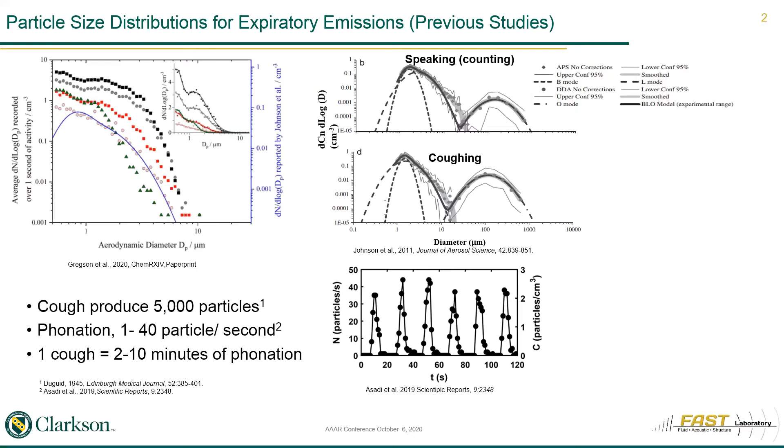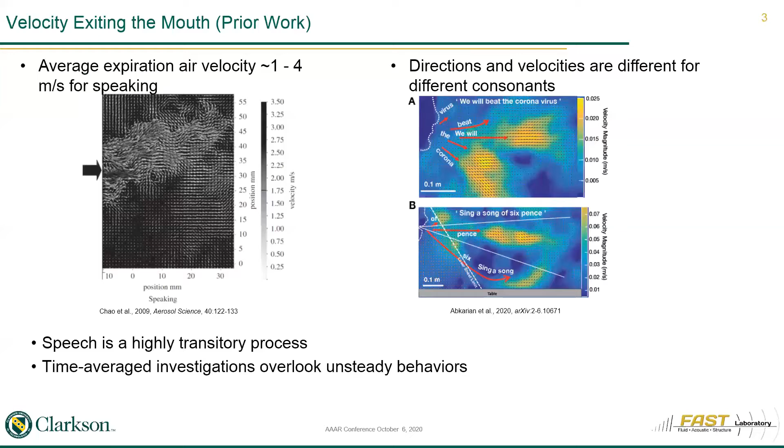Although one cough can produce as many as 5,000 particles, phonation has been shown to generate up to 40 particles per second, indicating that 2 to 10 minutes of phonation can produce as many total particles as one cough. Prior work has found the time-average velocity at the exit of the mouth to be in the range of 1 to 4 meters per second for a variety of phrases. Time-average measurements during running speech, however, obscure the highly transitory nature of voice production.

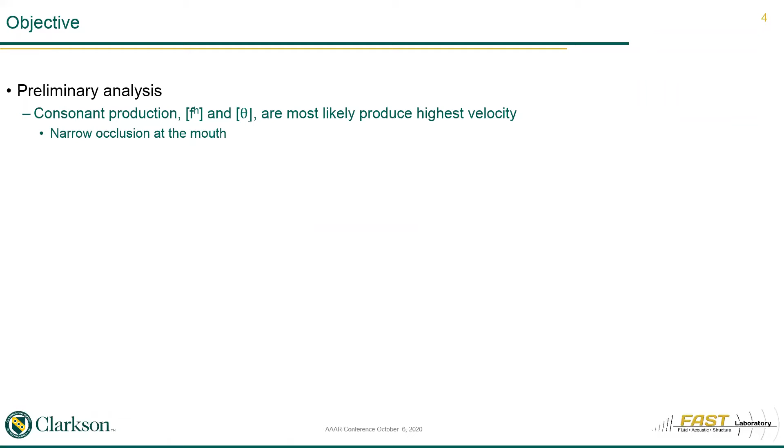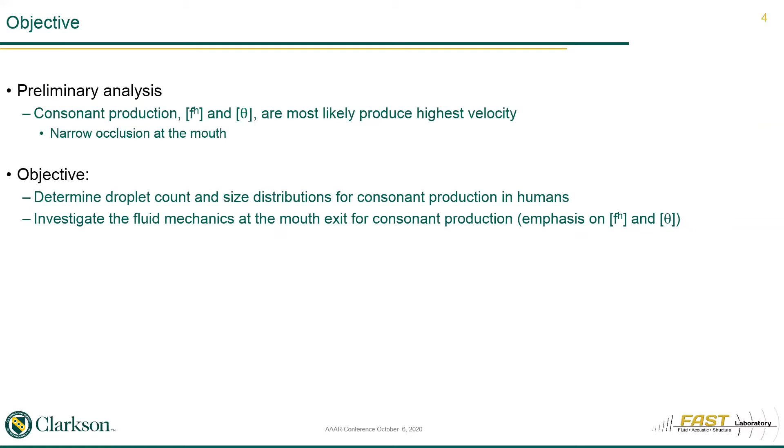From preliminary flow visualization during consonant production, we have found that fricatives that form a very narrow occlusion at the mouth, such as F and TH, are most likely to produce high velocity bursts of air. This observation leads to the objective of this work. First, determine the droplet count and size distribution for consonant production, and second, investigate the fluid mechanics at the exit of the mouth for these same consonants, where initial emphasis is placed on investigating the phones F and TH.

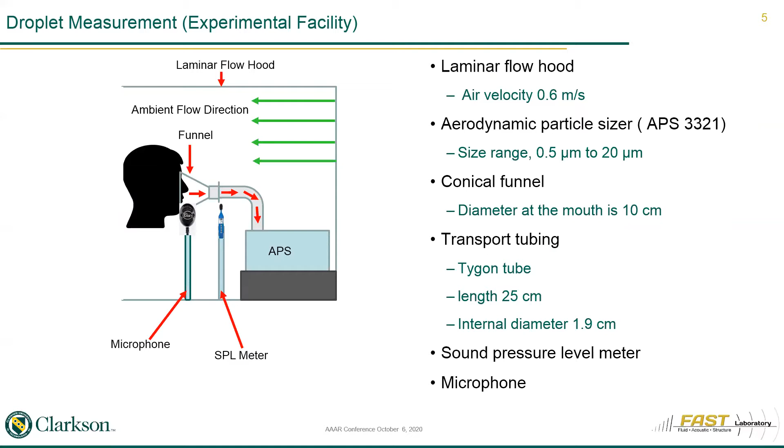Droplet measurements were performed using a TSI 3321 aerodynamic particle sizer in a laminar flow hood, resulting in a zero particle count in the background. A sound pressure level meter and a microphone simultaneously recorded the sound production. We have investigated 16 different consonants by saying a consonant-a intonation, for voiced fricatives, voiceless fricatives, voiced plosives, voiceless plosives, and nasal consonants.

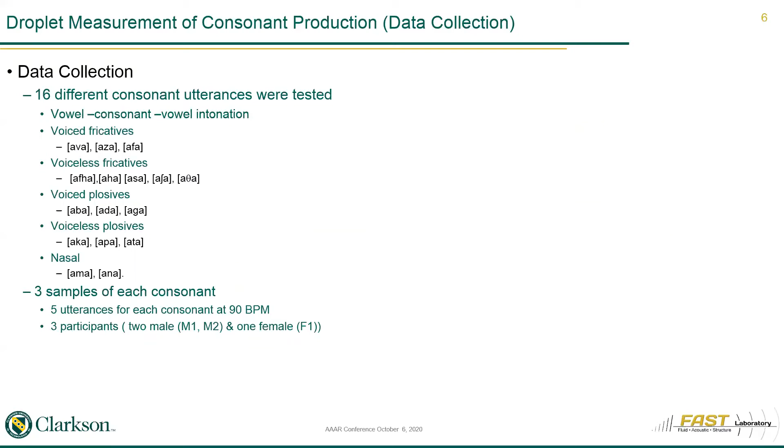5 utterances were repeated over a 10-second sampling time. This was then repeated 3 times for each utterance. Data were collected from 2 males and 1 female. During the recording, participants maintained a sound pressure level of 80 dB, measured 15 centimeters from the exit of the mouth. We corrected the raw data to consider particle loss during sampling and transport through the tubing connecting to the APS, which was found to be less than 5% for particles less than 10 microns in diameter.

Humidity measurements in the tube, mouth, and ambient surroundings revealed negligible droplet size reduction due to evaporation. So we reported the size of the aerosol as they were measured in the APS. The cumulative number of particles produced by all participants for each utterance varied significantly, from 33 to 83 particles. On average, nasal consonants produced the most particles. However, a larger sample size is needed to ensure statistical significance.

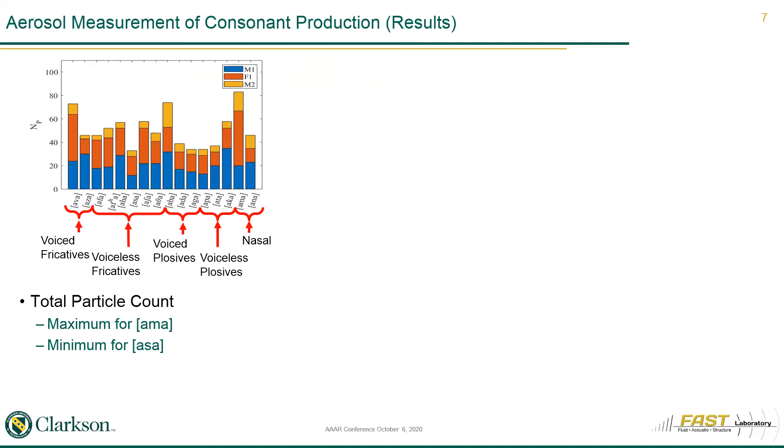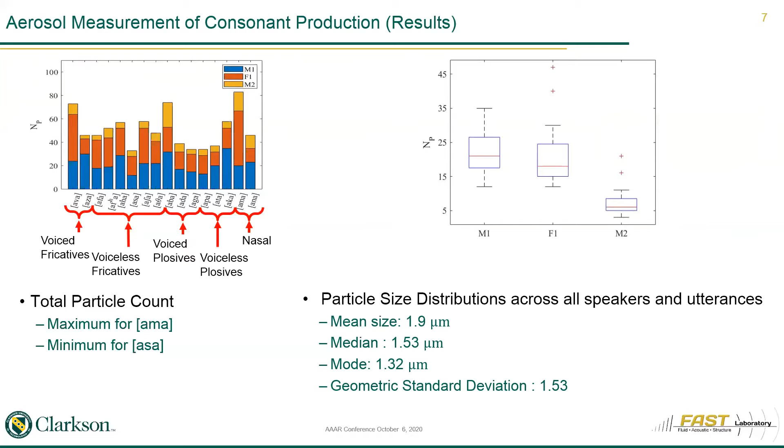Interestingly, droplet production per utterance also varied significantly from person to person, as did average droplet count. The average particle count across all utterances, as shown in the box plot, was 22, 20, and 8 for the 3 participants. Particle size distribution across all utterances, which is not shown here, revealed consonant production produces particle sizes between 0.7 to 6 microns, with a mean size of 1.9 and a median of 1.53 microns. The geometric standard deviation was 1.53.

Next, we performed fluid flow measurements to provide qualitative and quantitative analysis of the expiration velocities. Initial flow visualization of consonant production in a freezer at negative 10 degrees Fahrenheit indicated that fricative consonants produced by occlusion at the mouth result in the highest exit velocity. Hence, subsequent investigation focused on these utterances.

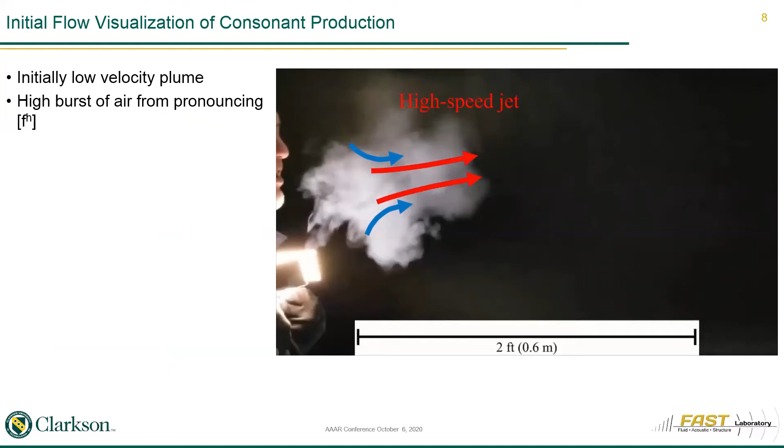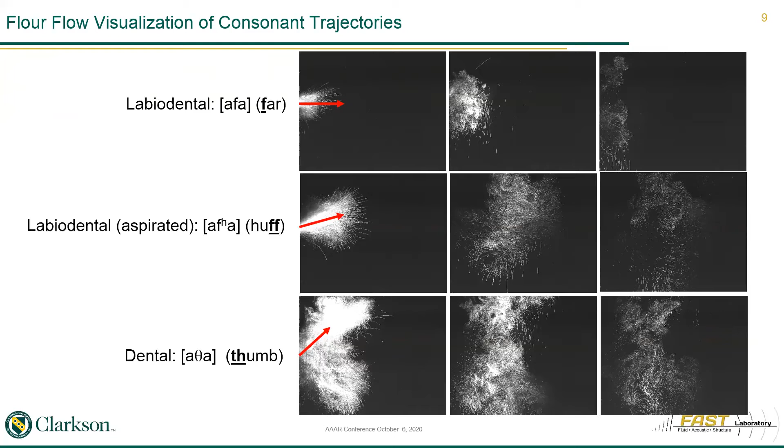The trajectory angle of expiration is an important parameter to determine the settling time of droplets. To investigate the trajectory of consonant expiration, flow visualization was performed using a laser light sheet to illuminate the expelled cloud. Snapshots in time allowed estimation of the initial trajectory of the expiration.

The approach was repeated for a variety of fricative consonants, which are plotted as a function of angle. The trajectories vary over a broad range from approximately plus 35 to negative 30 degrees.

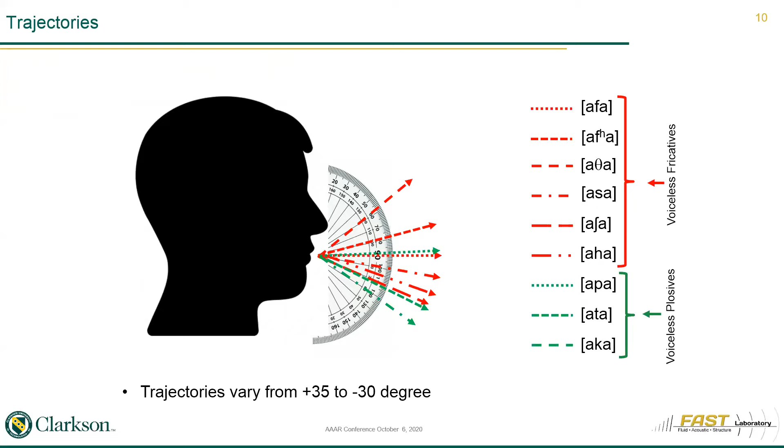To enable quantitative comparison, we designed a two-dimensional idealized human mouth model for F and TH consonants based on estimated MRI measurements of the mouth. The gap between the teeth and tongue was specified as 0.78 millimeter, which is consistent with the physiological measurements. The mouth model was placed in the shown experimental facility.

Compressed air provides the flow, which then passes through a flow meter, an olive oil atomizer, and a plenum chamber before entering the mouth model. An inclined manometer monitors the lung pressure, and velocity fields are acquired with 2D particle image velocimetry with a spatial resolution of 0.22 millimeter.

1000 PIV images were captured for each utterance and are presented here as velocity magnitude contour plots for fricatives F and TH at a subglottal pressure of 600 Pascal, which corresponds to comfortable phonation. Most noticeable is that the maximum velocity magnitude at the exit of the mouth is 18 meters per second for F and 25 meters per second for TH, which is significantly higher than previously measured values for running speech.

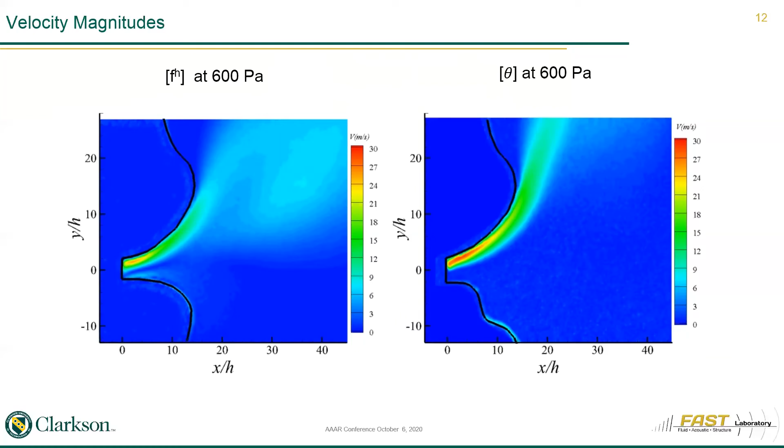The flow trajectories are angled up, which is similar to the flow visualization. The tongue and upper palate geometry directs the flow exiting through the teeth to attach to the upper lip. Once attached to the upper lip, the flow remains attached due to the Coanda effect and follows the curve of the lip. As the velocity of the flow decreases, the wall normal pressure gradient arising from the centrifugal acceleration of the flow decreases, and the adverse pressure gradient becomes sufficient for the flow to separate from the lip surface.

Plotting the RMS of the 1000 velocity field acquisitions identifies that for F, a significant spread is observed in the downstream jet. This occurs due to the instability in the jet. Interestingly, the instability in the jet trajectory is not as pronounced for TH.

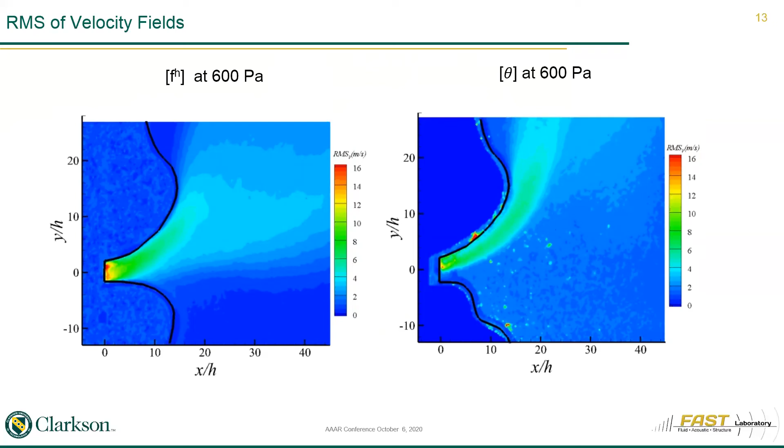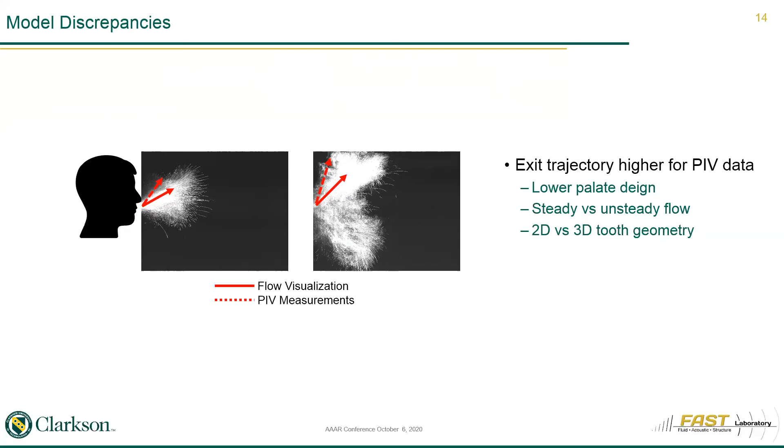The trajectory of the jet in the PIV measurement is significantly higher than for the flow visualization data. This is likely due to the simplification in the mouth geometry and investigating steady 2D flow as opposed to pulsatile 3D flow. Subsequent work is focused on incorporating these improvements into the model measurements.

In conclusion, we found that the droplet production by consonant production exhibits significant variability on both an utterance and speaker basis, with nasal production producing the most droplets. However, additional data are needed to reach statistical conclusions. Expiration trajectories were found to vary widely over a range of 65 degrees, which has significant implications for predicting the large droplet transport that follows ballistic-like trajectories.

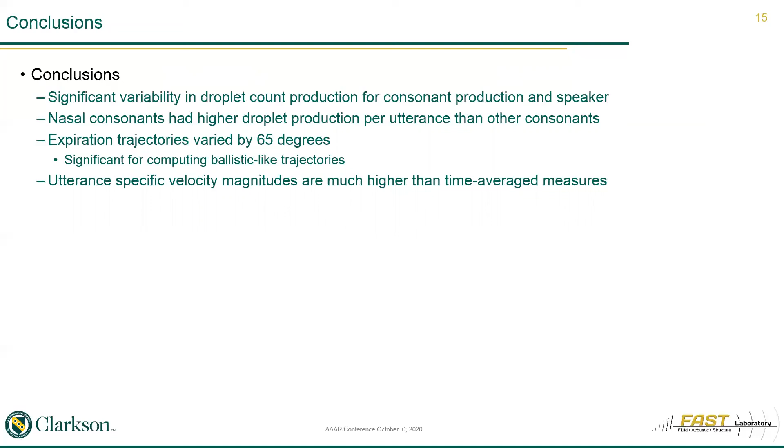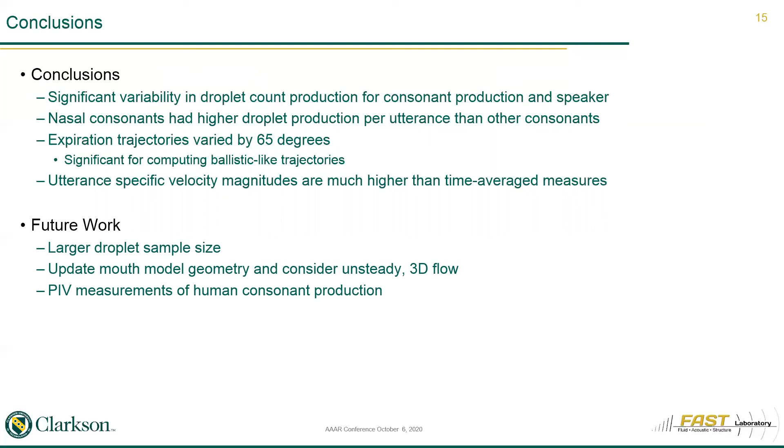The velocity magnitude for fricative consonant production was also found to be almost an order of magnitude higher than the time-averaged velocity measurements, again indicating the importance of transient behaviors in speech production and their influence on droplet transport. Updating the geometry and behavior of the physical model should provide more physiologically realistic data that can be used to compute momentum fluxes or predict particle transport mechanics.